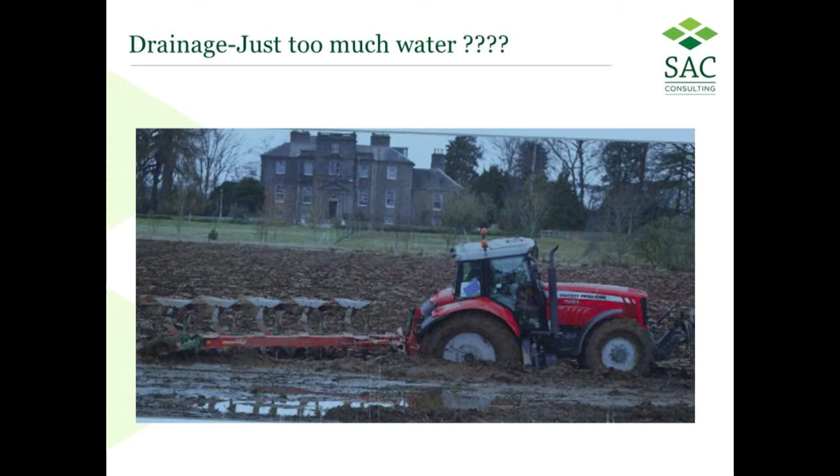Because we're certainly seeing a lot of fields that have never had water lying in them, ponded, that had never had that for the last 10 or 15 years. But we're also seeing areas where the problem is actually deeper. It's down below the ground, it's down at the drain level. So we're thinking a wee bit about the problems we see with poor drainage.

You drive along, it used to be you saw rushes and buttercups in your neighbour's field and said, well, he's not much of a farmer. Unfortunately, we're seeing more and more of those in our own fields. And it's simply because the water table is getting higher, more damage, more compaction, and we're seeing the sward open up. The sward's not lasting as long, having to reseed a wee bit more often, and we're getting these weed grasses. That's inefficiency, we're getting lower yields of grass or crop.

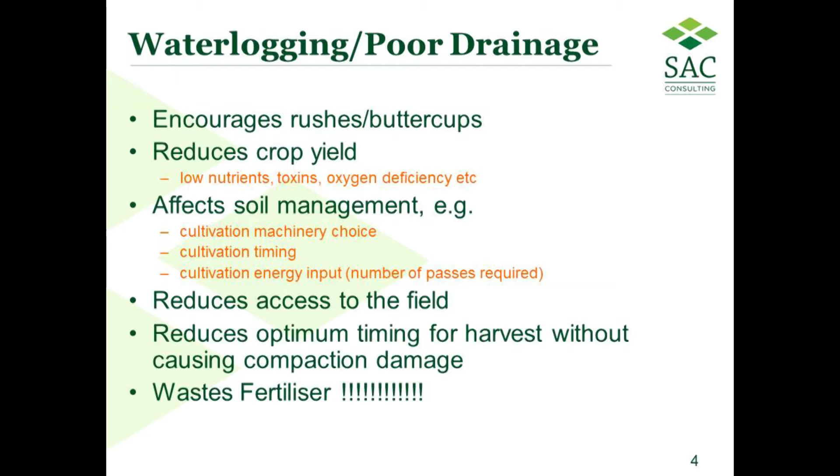We can't get in and do the work right. You know the problems, even getting access to the field is now proved to be a problem. We have a lot of big dairies now, and they seem to have increased in the last 2 years. We've got boys now going up to 300-400 cows, and you can put in as many cow tracks as you want. But once they step off that cow track, if you go grazing, that's where the damage has been done.

So we're saying to them, maybe we need to start looking at how we actually get these cattle grazed if these summers are going to continue. And I was very impressed with the gravel mole, I think that was a good tip as well.

It wastes fertiliser. Waterlogged soils, your nitrogen phosphate are not as available. So think about that. The benefits though are easy to see as well. We get improved root growth. Why do we get that? Roots will not grow if you don't have the conditions right. They need nutrients, they need water, and most importantly, they need air. If they don't have the air, they'll not grow and develop.

And if the air pores are full of water, there's your problem. So we're trying the whole time to create more air in the soil so that the roots develop better, and that's going to help our yield of crops and grass.

It's also an increasing problem. I'd imagine it's something similar over here - we're seeing more and more incidents of fluke in the southwest. We have sheep farmers that have dosed their sheep 5 times this year just because of the level of fluke. Remember, the important bit of the fluke cycle is that wee mud snail, and that wee mud snail loves ponded water. So we're now getting to the stage where we need to think more strategically and start draining some of these ponds and make sure the water isn't lying, and that might help break the life cycle of the fluke.

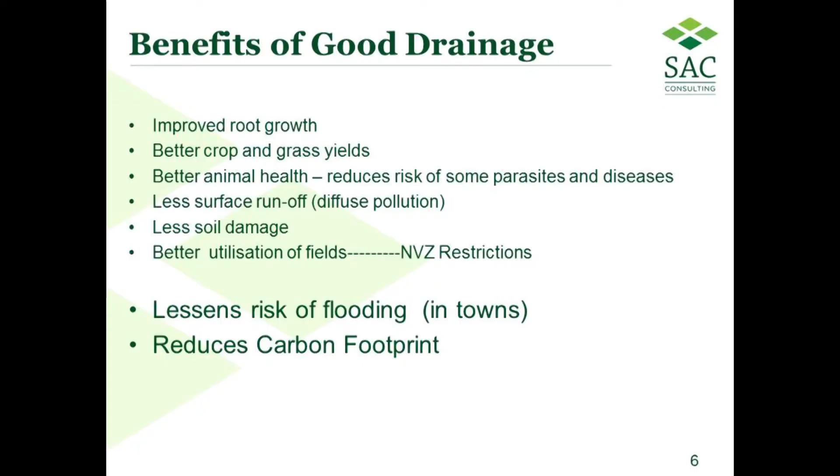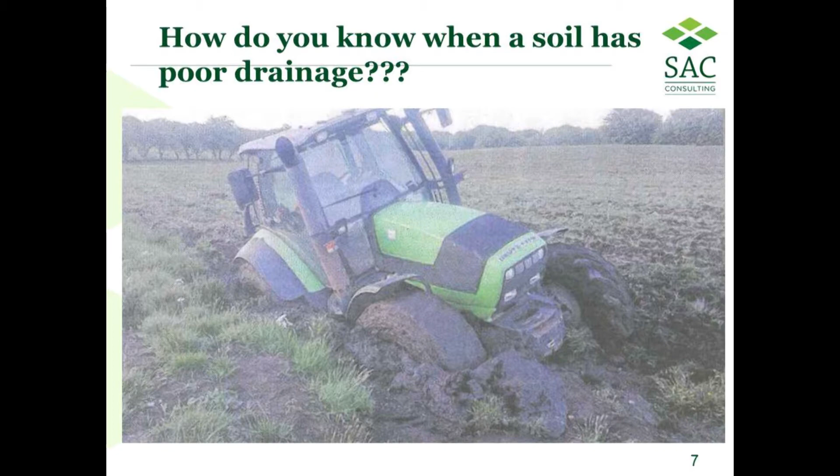How do you know when a soil has poor drainage? Pretty obvious - that's the problem. I've been there in that type of situation, and it's easier to get into that than it is to get out of it. So it's better in the long run not to put yourself in that situation, and we do that by thinking a wee bit about drainage.

That's one of the outward signs. Another outward sign would be getting stuck with the quad bike, or seeing water lying across the field coming off. It's just telling you water's lying on the soil surface and it's ponding, it's causing problems.

Dig down a wee bit with your newfangled machine - that spade you bought or were given as a gift - and see what's happening. Quite often with soil type, you start off with your topsoil, and then it comes down into your subsoil, with different layers below that. That critical depth is at 8-10 inches, and that's what we're trying to keep freely drained. If you dig down further, quite often 20-24 inches, you'll sometimes see the water coming out at the base of the topsoil. That's because it's hit a less permeable material and has to bank back up again, and that's where we get this idea of a perched water table.

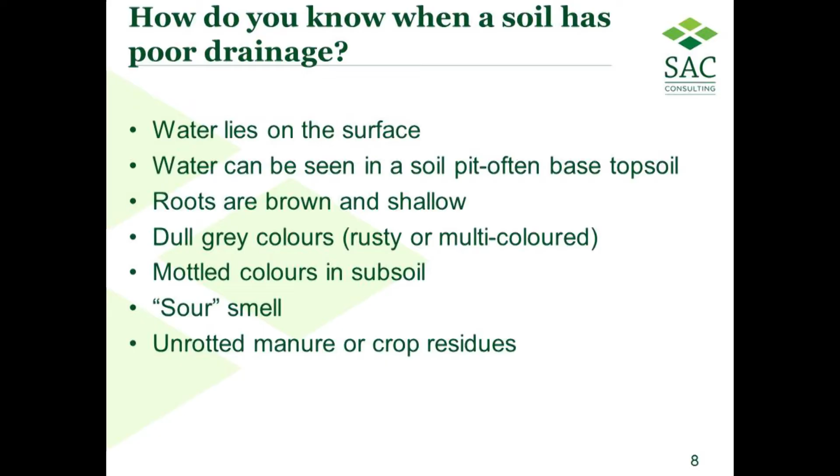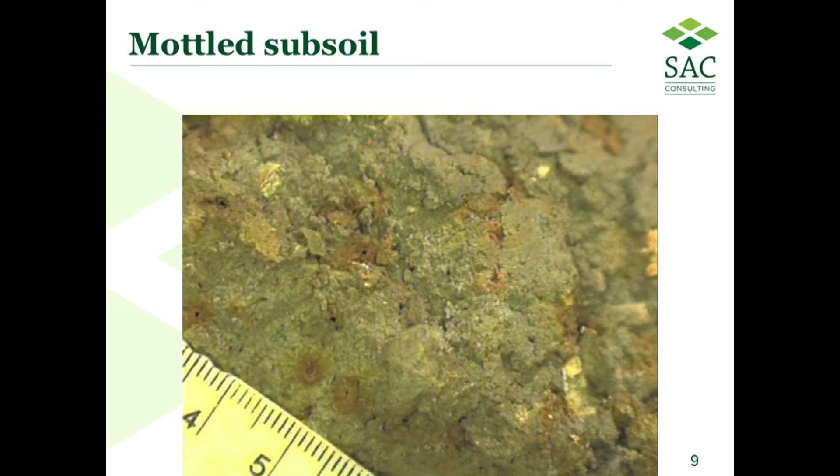You might also see it in the roots, which will be shallow, maybe brown. You'll see colours in the soil, this mottling, and that's just a sign of intermittent wetting and drying - that's the iron in the soil settling out again. It's in solution, and whenever the soil in the summertime gets drained and the air comes back in, you'll see it settling back out again. Sometimes you see it even in roots.

Like in here, you'll see that's a gley soil. That one's got a lot more problems because that soil will be periodically wet, probably for 7, 8, 9 months of the year. And you can see the impact it's having on the soil structure - there's no cracks, no natural cracks or fissures.

30 years ago I wasn't seeing that. It's a new problem, it's understandable - the weight of machinery has increased, the intensity of farming has increased, the number of livestock going across the field has increased. We're seeing fields that have been ponded.

I saw one about 5 months ago, and the fellow said, 'You come down, I've got an area, big pond, it's appeared overnight.' I said, 'What happened?' We went out to look at it, it sloped down, and he put slurry on via the umbilical, and whether it was a result of that running down and sealing, or whether it was just compaction further out, and then whenever it got heavy rain again - he said it rained really heavy the next 3 or 4 days after I put it on - it just got washed straight down into this pond area.

I said to him, 'Are there any natural drains to get down to clear this pond?' Because quite often the solution there is just to find a drain and gravel it back up again, get it away. He said there's no natural cracks or fissures, no natural drains in that, it was free draining before. I said, 'What are you hoping to do?' He said, 'Well, I'll run the subsoiler through it.'

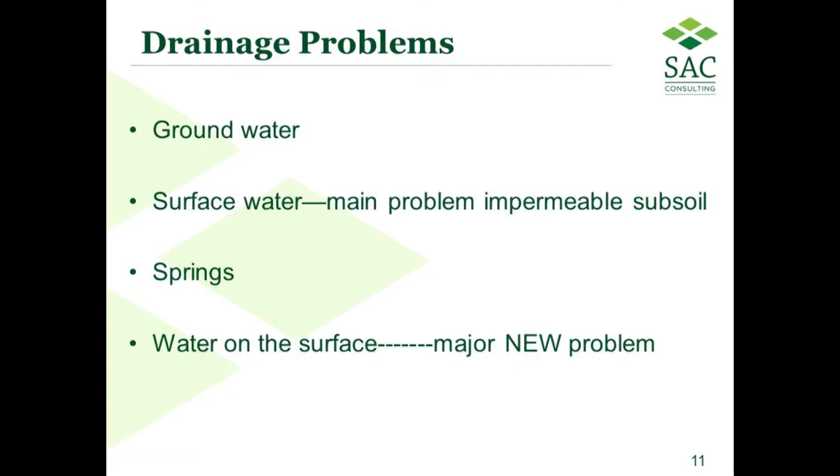Start off with the groundwater. It'll not be dissimilar to areas around Lough Neagh, anywhere you've got rivers, alluvial soil, even the shore. And the problem is always this water table rising up and down. All you can do is try to control it by putting drains in and leading them out.

Your drain depth will be dictated by the outfall, whether it's into a river, into the sea, or wherever. But the deeper you can go, the better with a groundwater problem. The deeper you can go with a groundwater problem.

Traditionally in Scotland, we have it now - you speak to farmers and they'll say you need to be down deep. And why is that? Because the old clay tiles were not down deep - they were down 3 feet, in some cases 3.5 feet. In some cases, a lot of them were done by Irish navvies that came across about 150 years ago. Those boys must have been working hard, but they were doing things wrong. That's fine if it's groundwater, but not if it's a surface water problem.

So think of the problems. With groundwater, deeper drains - we don't necessarily need backfill around them if that's the only problem, because these soils tend to be more sandy, alluvial type, free draining topsoil. You may put a bit of gravel around, pea-sized gravel as a filter, and leave it at that.

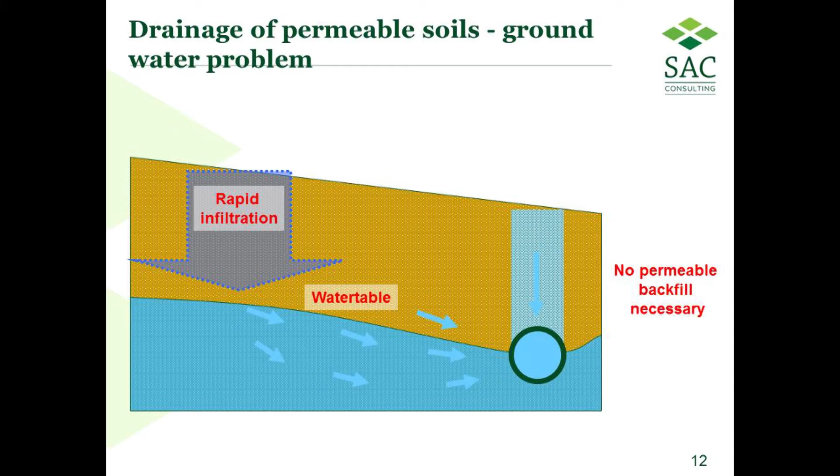It is possible you may end up with some surface water problems as well, and you may still have to go in - that's where you've got a combination. If it's just a groundwater problem, deep drains, and the closer you bring them, like all drainage, you'll lower the table and have a bigger impact, but you'll have to decide on cost.

So that's groundwater, reasonably straightforward to solve. The surface water problem is our most common problem, be it in Scotland or Northern Ireland. Think about what's happening - we've got this free draining topsoil, the water can get through, then it hits something that's not as well drained. The water will still get through, but it'll take time.

If you're in a flat area - this is the less permeable subsoil, and there's the topsoil - all that happens is the water comes down, hits this, waits, banks up, and eventually you get a perched water table. The water table rises back up again, and at the same time the cow's feet come down this way, and where they meet we get big problems with compaction. So we're trying to keep that clear.

It's fine if you're on a slope - it'll help, it'll keep itself clear to a certain extent, running along. If you dug down there, you'd see that water runs along, and eventually it'll run out and begin to pond back out again when it runs out of slope. That's a surface water problem - we're dealing with impermeable or low permeable subsoil.

The solution - it's not the pipe that's important, it's this gravel connection back to where the damage is. You're trying to get the gravel connection back up to the base of the topsoil. In Scotland, that's all we go to. I know in Northern Ireland it's common practice to go right to the surface. Think of the extra cost of gravel, but you must get it to that level - that's where we get the interface, taking that collected water quickly to the drain.

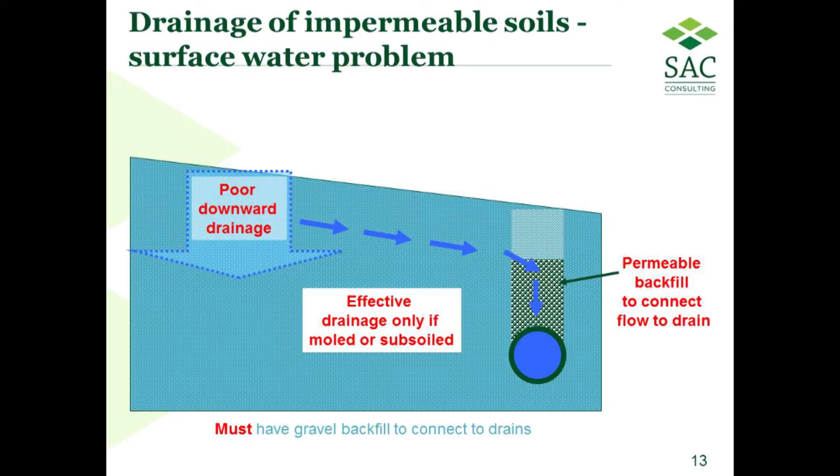And we're using this free draining, clean gravel - whether it's stone, whether it's quarter inch, whether it's pea-sized gravel, it doesn't really matter. It's the connection that's important. How wide should they be? In an ideal world, the closer you go, the bigger control you have over the water table.

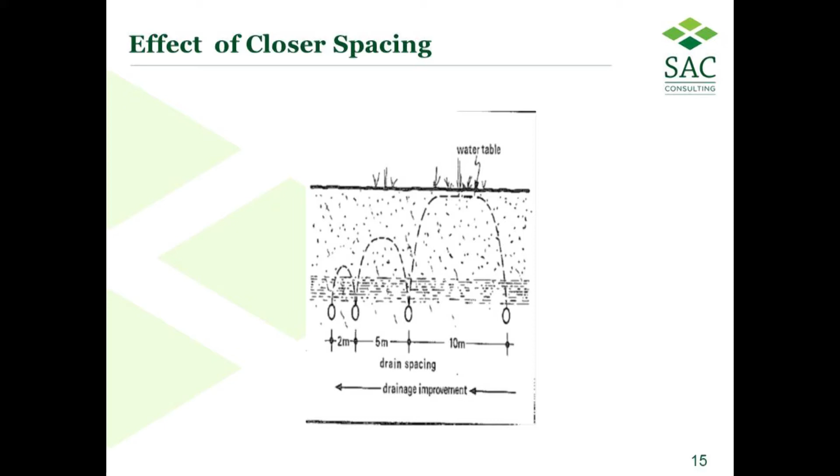So even with this perched water table, the closer I go, the bigger control I'll have. That's out at 10 metres, that's at 5 metres, and that's at 2 metres. The problem is your pocket - you don't maybe have deep pockets. It's all right for playing fields, they'll go down to 1 metre, and go with sand slits over the top as well. Same problem, but you can't afford to do that - or can we?

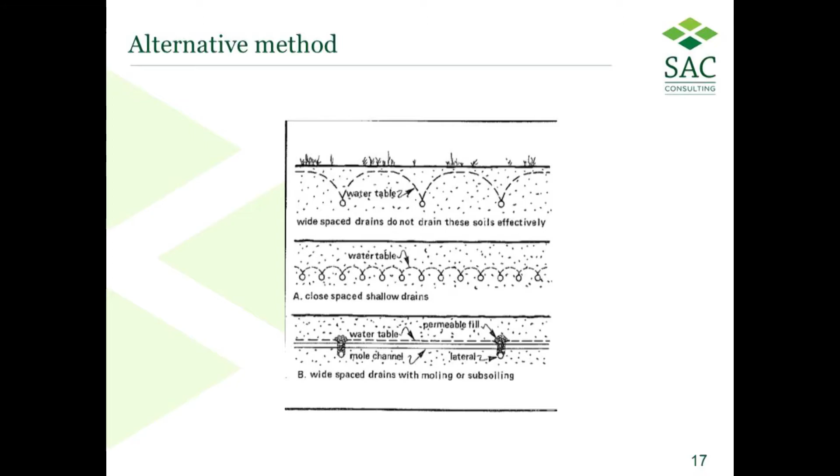There was a problem we were faced with 30 years ago, and we came up with a solution which was to think about secondary treatment. So with the primary treatment, we're still laying the gravel laterals, but then we're going to superimpose on top a whole lot of secondary treatment - in effect, closely spaced drains, whether those are moles, mole ploughed, or subsoiled - it's the same idea.

With subsoiling, you just get a lot more cracks all wanting to run. But the important thing is you run that at an angle across into your gravel connection, so the gravel's doing two jobs - it's providing the connection initially in its own right, but it's also now offering a very quick connection for the secondary treatment. Did it work in practice?

We did a trial in 1981 on a farm down here on the route down to Carlisle - a dairy farm, pretty heavy silty clay. It could take a mole because it had more than 35% clay, and it didn't have sand pockets. The biggest challenge was trying to convince farmers at that time - we were used to drainage being all about tradition.

Tradition on that site was 7 metre spacing, running up and down the slope. If you think about it, if you have a drain there, and a drain over there, the bit in between, and the slope growing, that water is going to run all the way down and keep running. Whereas if you put the drain across the slope, you connect it further up the field before it's got the chance to do as much damage.

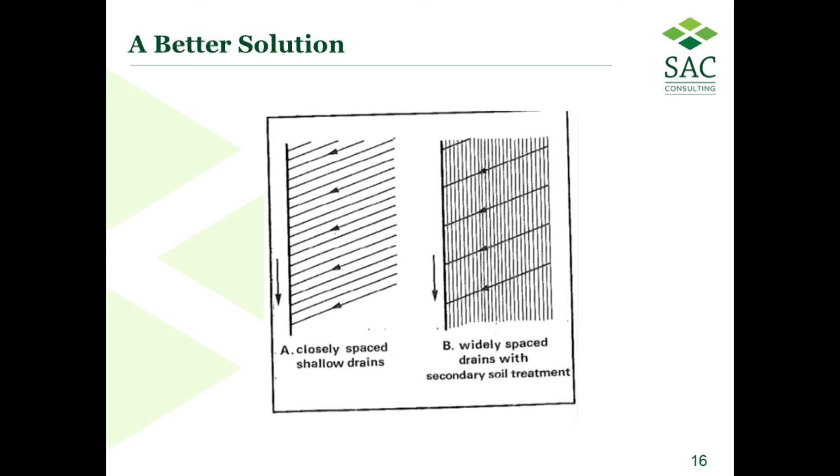So that was a challenge. We decided we'd go in, and instead of 7 metre, we went for 10 metre spacing across the slope, and compared that to 20 metre spacing across the slope. On this side we just went to the secondary treatment, which in this case was a mole plough. It could have been a subsoiler, but in this case it was mole plough.

Did it work in practice? We looked at drain flow, took measurements every week, and wanted to see how quick the topsoil could get dewatered. When did the drain stop running? You can see what was happening with the secondary treatment - the drain started running very quick, and look how fast and how much water was running, then gradually slowed down. By about 2 days it stopped running.

The other 10 metre spacing, the closer spacing, was fine - it was still doing a good job, but it wasn't as effective. Because it's still a drain every 10 metres, versus this being a drain every metre. So that's the difference in the benefit of secondary treatment, if you're able to do it.

The biggest problem in Scotland, where I am, is a lot of our soils don't suit the mole plough, so we're relying more and more on the subsoiler. For that, you're heavily dependent on the weather, particularly in late spring, early autumn. The last 2-3 years, we haven't had the weather for subsoiling - the subsoil hasn't been drying out. And if you go in too deep when it's too wet, it'll just form a kind of mole. So just think about the timing of the treatment.

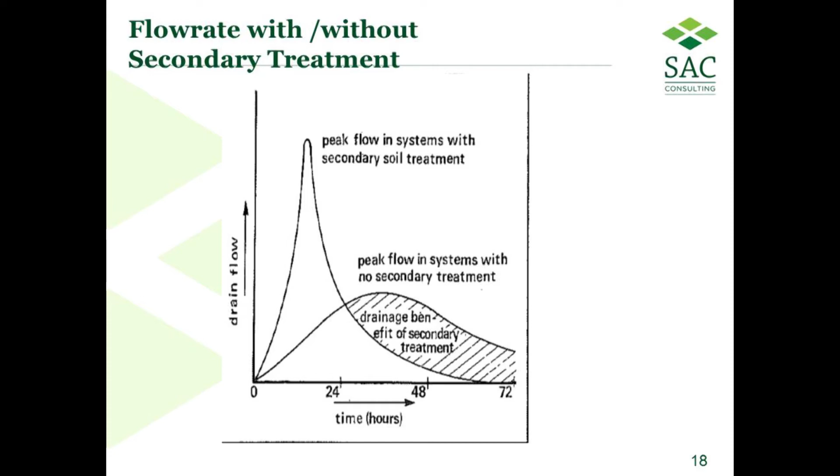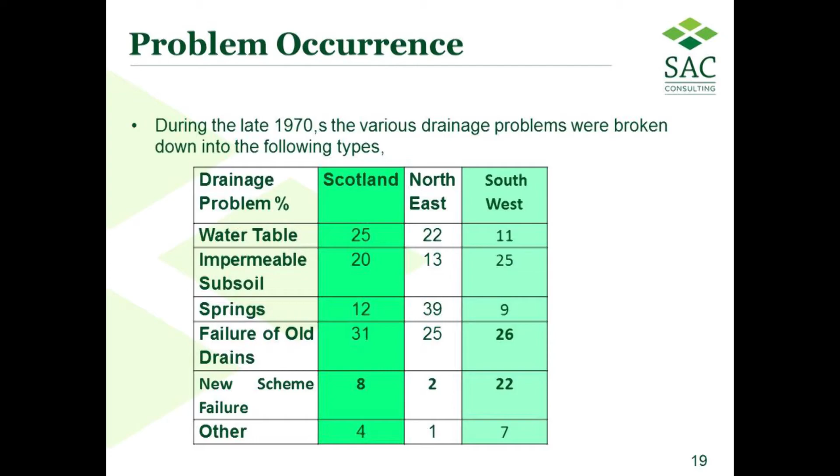It definitely works. As for types of problems, I said at the beginning we did a survey and were getting as high as 22% of new schemes failing. That was 2 years after these expensive schemes were getting a 70% grant. Why was that? It was a combination of 3 factors coming together at one time.

Plastic pipes had been introduced. Previous to that, it was clay tiles. The benefit of the clay tile was you could see it if you had put it in wrong - it was easy to see from the surface. With plastic, there was a tendency at the beginning where people didn't know how to handle it over our side of the pond, and contractors would just kick it in. It was going in up and down and sideways, and then they would backfill.

And a lot of farms, it wasn't traditional to use gravel backfill. Now, there's some soils you can get away without using gravel backfill, but even where they were draining, you should probably be using gravel backfill - that might help. But they were going in, putting these pipes in, and then just backfilling over the top.

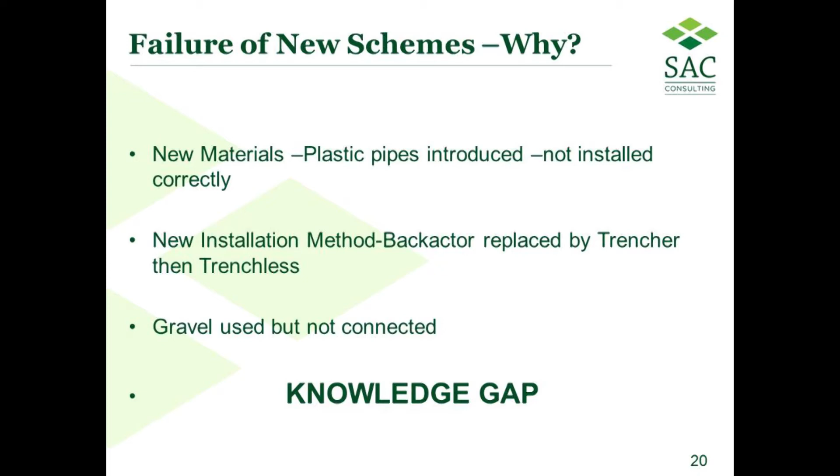The right way, or best practice way, to lay a plastic pipe gravel system - I would always start off by digging your trench as flat as you can get it, or to a break flow, and then stick in the first 1 or 2 inches of gravel. It doesn't need to be any more than that, and that gives you a nice clean bed for the pipe to sit on.

That straight away means your slots - there's as many slots in the bottom of the pipe as there is in the top - are sitting nice and clean from the day the pipe's fitted in, able to receive the water. Stretch it a wee bit, don't overstretch it to weaken it, put in some bats of stones to keep it in place, and then carefully with your gravel wagon, or if it's a link box with gravel you're shoveling in, put the first shovel of stone in carefully so the pipe doesn't bounce up, because you've only got 60 mil of pipe to work with. Once you've done that and covered it with 3 or 4 inches, you can go away and leave it, or let the young fella loosen the gravel wagon and bring it up to whatever level.

You're not going to do any more damage. You've done the important bit, got it right, got it off, and that in itself is going to extend the life of that scheme.

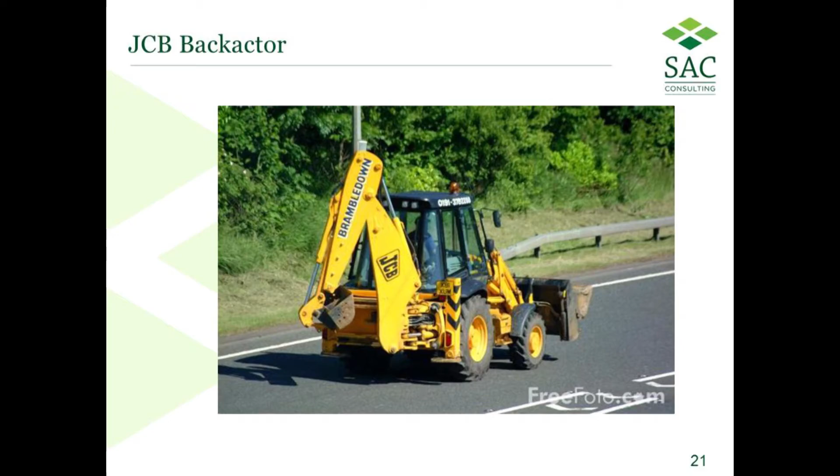The other thing we had was the type of machine we were working with. We were back 30 odd years, 35, 40 years now, and they were using the back actor. Absolutely nothing wrong, good machine, a digger, digging a trench, there's no problem with that. But they were using it the wrong way, simply because we had soils where they should have been using gravel backfill with this surface water problem.

And they said, oh, we've never done that before. But at that time, they were always using the back actor, and they were maybe taking the topsoil out, setting it to one side, and then maybe putting that topsoil or sod back in again on top of the pipe. And that in itself was free draining, almost like a kind of connection.

And then even the sods you were putting back in themselves, you had these natural cracks and fissures. So although it wasn't gravel backfill, it was almost serving the same purpose.

We began to change from the backactor to a trencher machine. The trencher machine has a chain on the end here, and it sends the soil out 2 sides, and all they did was come up, then come back in again. They weren't using gravel at this time, they just bulldozed that in and filled the trench. So we had a nice pipe, sealed with that material, because there was no mixture at top.

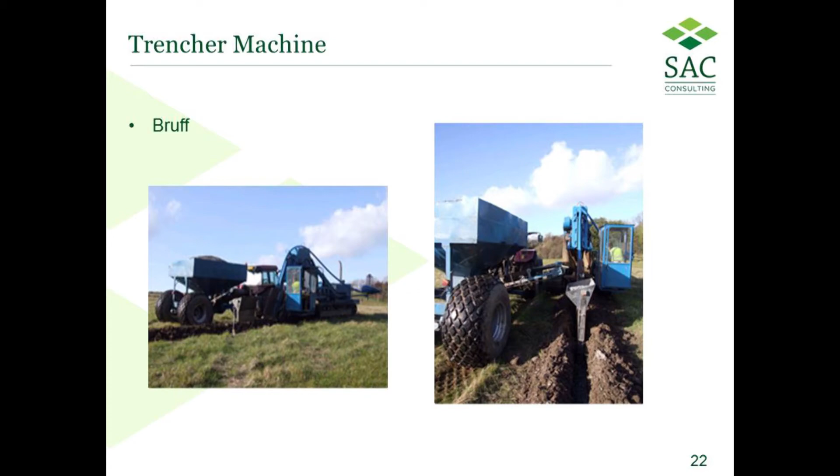You couldn't separate the topsoil. That machine was just grubbing up everything, so you ended up getting topsoil and subsoil mixed, something sealed over the top of the pipe. We had no connection. So that was a damage mistake.

We even tried it with the trenchless machine, and that's the business end of it. It's just like a giant mole plough, and it only has 100 mil, 4 inches spacing. So you think, how easy for it to seal again without gravel backfill.

We started saying to contractors, you must start using gravel, and they started putting the gravel hopper on the back and going through. The benefit of that machine is output. You can do a horrendous amount of acres in a day with that machine. You're only using 4-inch wide gravel, so it's more efficient, cheaper in that sense.

We did run into 1 or 2 problems with bigger stones. I tried using a 2-inch stone, 1.25 to 2 inch, and it started bridging. And they began to say the only way you can actually do that is using 1/4 inch or pea-size gravel. So again, for that type of machine, 1/4 inch gravel or pea-size.

Traditionally now, unfortunately, a lot of our farmers think that's the only stone you should be using for drainage. Nonsense. You can get away with your 2-inch as long as it's clean material. You only need the pea gravel if it's specific, if it's running sand or you're trying to use it as a filter. Any other time, the coarser gravel is fine, as long as it's clean.

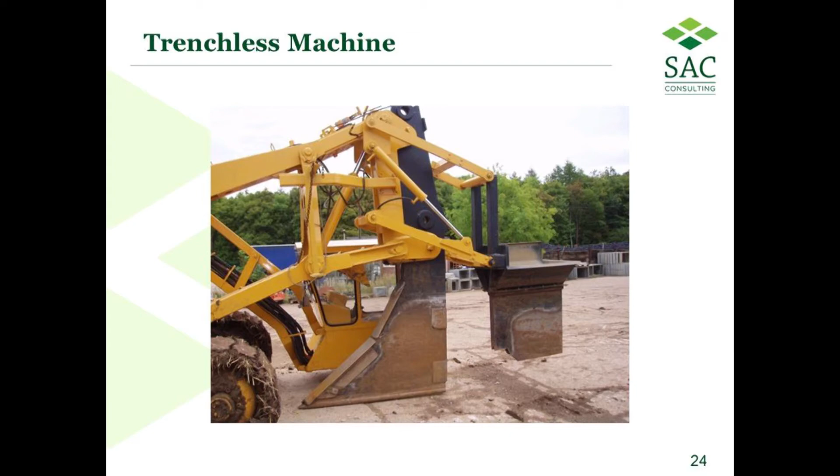We're now seeing a group of farmers, big dairy boys with thousands of cows over near Castle Douglas, and they're saying the price of gravel delivered, is £15 a tonne with us. If I use my own rock, I can get it for £3 a tonne. And they've now started digging out and just backfilling with the rock. And I can see where they're coming from, and it's fine.

They've even said, to avoid the issue with the plastic pipe and maybe big chunks of rock dropping on it, they've opted for a twin wall, thick plastic pipe, double skinned, 100 mil, costs £1.40 a metre compared to maybe 50 pence a metre for the 60 mil plastic.

And I'm saying, boys, you don't need to do that. You'd be cheaper to go and actually spend some money on cheap gravel and then still go with your rock. But you'd be better to fit your rock and spread it over and make sure it's clean.

The other thing it'd be better to do is not make the trench too wide, and that's one message you boys should take home. We would have been quite happy working with an 18-inch bucket, 20-inch bucket, tapered down to 12-inch, making a good size of trench, and the gravel wasn't too expensive, and that's the system to work with.

In Scotland, we quickly got contractors thinking about using a 12-inch straight bucket. Some even get down to a 10-inch straight bucket. In Ireland, you can get away with it, because you'll use less gravel. You still get plenty of gravel for that connection, more than enough.

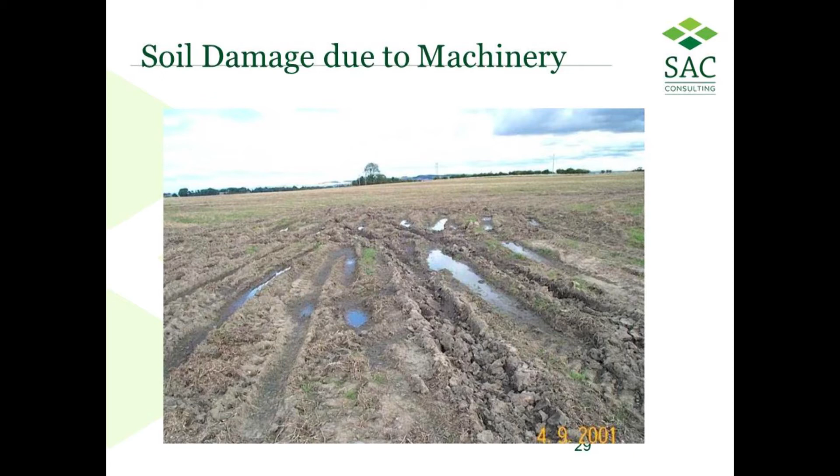You may have bits where silty clay is causing you ochre. You decide. You may have bits that have a better slope, you go a wee bit wider. I would always start at the ditch.

Sounds very sensible - if you've got problems, go back and see if your ditch works. Does that need to be cleaned out? We've had a lot of farmers who've gone this year, this spring, and started cleaning out the ditches. And they've said, not only has it helped, with a wee bit of pressure, with a wee bit of rodding or jetting, they've been able to get their drains running again.

And you haven't had to go in and do a full system, it's just a wee bit of maintenance. That's particularly the case if there's iron ochre in it - the jet may get it going.

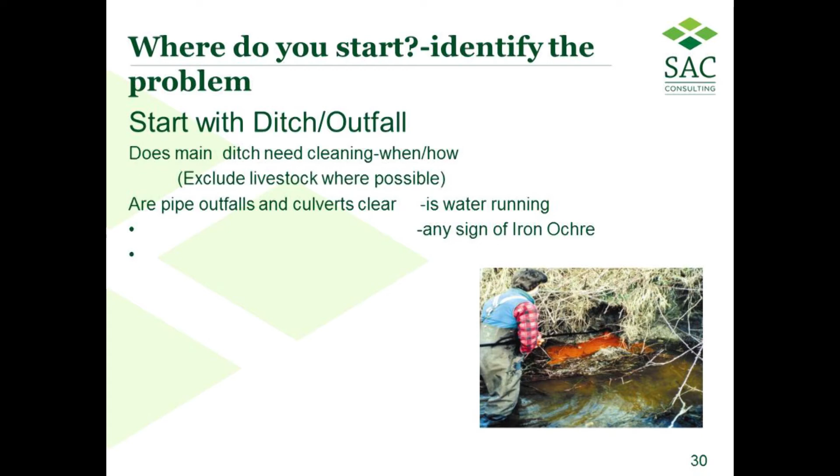When you're using gravel, the one thing I'd always say is, bring the gravel right out to the mouth of the drain, but stop before that. Good practice to put a 2 metre straight pipe on there to bring it out into your ditch. It's even better practice to bring the gravel to there, because if anything happens to that drain, the gravel will still act as a stone drain. So make sure you connect that right to the mouth of the ditch or into your leader.

Over in Scotland, I always say, if it's peat, leave it, unless you're Irish. The reason for that is it's difficult soil to drain - it's got a very low soil conductivity. You would need to have drains every metre.

So it might not be the first one you should be trying to sort. It might be the ones further up the slope - you'll be able to drain easier. You need to think, are you able to drain?

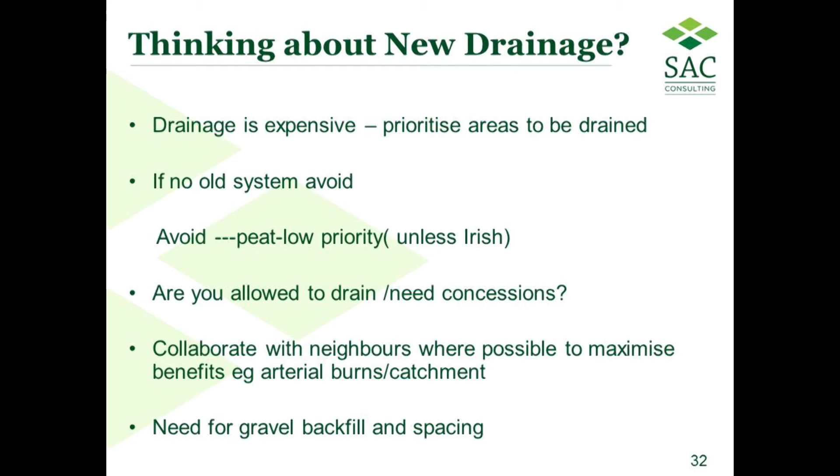We've already covered the design - you're going to be going across the slope. How close should the laterals be? I'll point out, the spacing is going to depend on how deep the pipes are, how much slope there is. You can get by with wider spacing if you've got a stronger slope. So it might be 10 metres at the top, might be 15 metres further down. You might even be out as wide as 20 metres if you think of the secondary treatment.

And you're thinking of intended land use as well. A dairy boy might, or a cropping boy might want to spend a wee bit more, be able to afford to spend a wee bit more than beef and sheep. So you have to sit down and decide - the spacing is going to influence the cost.

7-metre system, 600 metres of drainage every acre. 20-metre spacing, 200 metres of drainage every acre. So you can do 3 times the amount for the same cost.

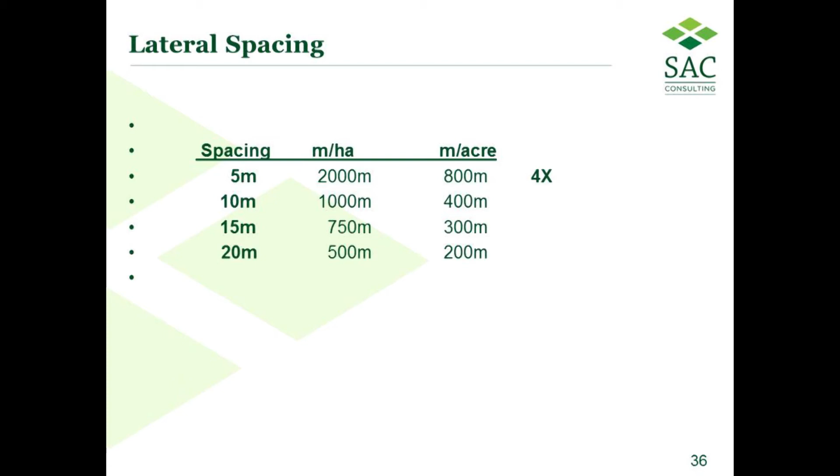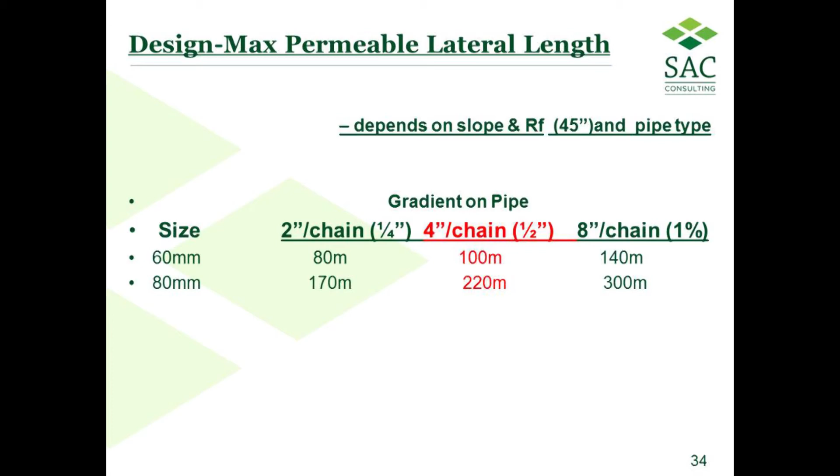It's not too big a problem, because if you're using gravel backfill, it'll still run, it'll act as a sump, and it'll wait to get into the drain and away. It may even run through the gravel.

How deep for the pipes, I've said, it depends on the problem. If it's a surface rock problem, don't go too deep. I'm saying 26, 28 inch cover is plenty.

If it's gravelled, a bit deeper for the leader, and deeper again for peat, because peat will dry out and shrink. I've seen cases where, at home, we put the drains in, my father said the peat is shrunk, and sure enough it had, because it dried out. He thought the drains had risen, but the peat had actually shrunk. So allow for that, because it'll come close to the surface.

It's going to be governed also by whether you have any old systems. In Scotland, we have to think about the old system. We have these drains going up and down the slope every 7 metres, and some of them are down 3 foot, some are down 3.5 foot. If they're down 3.5 feet, I leave them well alone. If they're sitting around the 3 foot and still working, I'll go with every third lateral going across and go deeper. I'll not do the others as deep as that.

But think of how you connect the old system as well. Size your leader accordingly - a 6-inch plastic R drain, one will take 5 hectares, one will take 8 hectares. Quite a difference.

This one's got turbulence, it's the corrugations on the inside, and you get turbulence. You get the smooth R drain, that could have been a 6-inch plastic or 6-inch concrete, smooth, no turbulence - you carry a bit more water.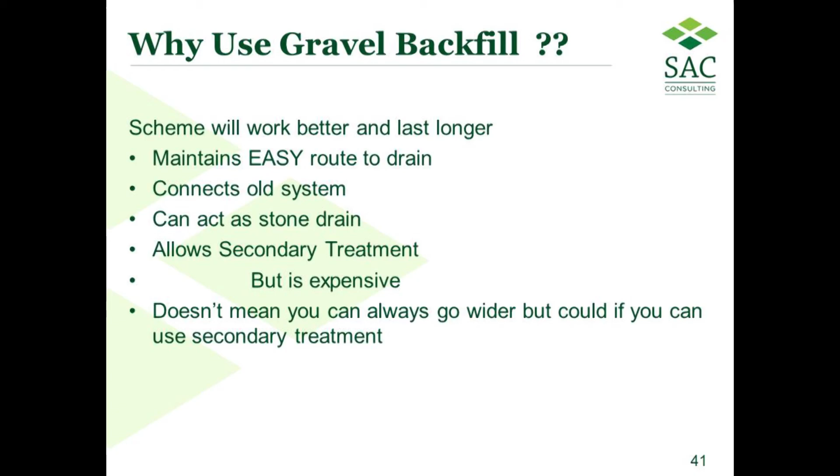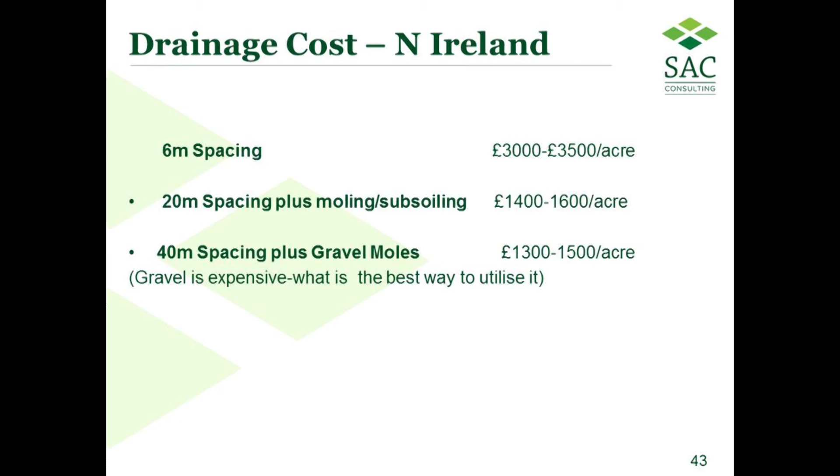Gravel backfill's main purpose is to maintain an easy route to the drain and get that topsoil dry quickly. It can also connect into the old system, acting as a stone drain if anything goes wrong, and it does allow secondary treatment, but the gravel itself is expensive. Think about the cost and make your money go further - don't have drains too deep, only gravel to the base of the topsoil or a couple of inches above it. It doesn't need to go to the surface; you can always go back and put bubble holes in later. Think about a higher trench, but you can go down to a 10-inch bucket grade, and think of sensible spacing.

You'll see the cost really go up if you don't plan well. Only do drainage work when it's dry - that sounds like common sense, but I think boys in Northern Ireland tend to do drainage in summertime, whereas in Scotland we have a tradition of draining in the wintertime. You're 50% more likely to have a failure if you drain in the winter.

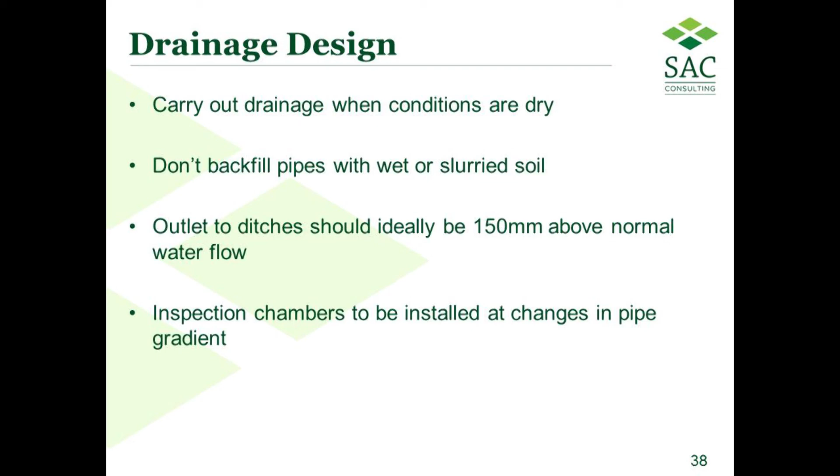Don't backfill pipes with wet, slurried soil. Make sure your outlets are sorted - if you've got peat, think about the issues there. With ochre, consider individual outfalls so you can rod the drain. If you're not prepared to do that, put in a manhole and lead a couple of drains into it so you can still get in and rod or jet them.

Think about roots - where you pass trees or hedges, they should be sealed off. My brother was telling me yesterday about a 6-inch drain job we did about 40 years ago. He said we should have gone for perforated pipes with 6-inch solid concrete, sulfate resistant, and put gravel around them - that would help with field drainage too. But he also said there were roots in these 6-inch pipes that you have to sort out. So where you've got a hedge or a tree, come out a bit rather than putting your leader drain right in tight against it - come out into the field a wee bit.

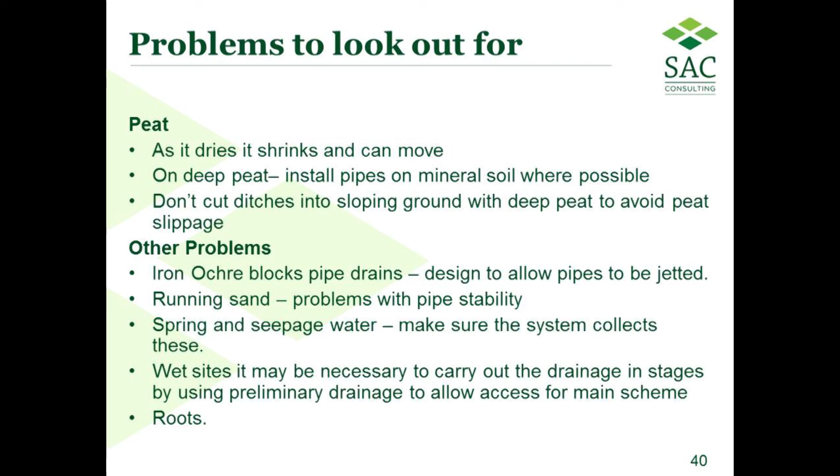We've seen problems where boys put kale in, or rape, after doing drainage in a hill situation. If you get a dry summer, the roots go straight for the water - and where was the water? In the drains. I saw 30-40 acres on one farm destroyed simply because of this. We got to the stage where we were actually recommending that where you've got kale in, if you think it's going to be a fairly dry summer, you go in and spray off a strip across the top where you've drained. So think about roots and these other problems.

Think also of your wider responsibilities - be that ESAs, triple SIs, or areas you're not allowed to drain. You might have been allowed to drain it 30-40 years ago, but think about your cross-compliance issues now. Speak to Don and his team about that, they'll keep you right. Over with us, you can't go up and drain virgin hill - you can use sheep drains, but you can't drain virgin hill with rough grazing. You shouldn't be piping ditches without consent. When it comes to ditch maintenance, our environmental people now say you can only go down one side, across, and pull up - it used to be you'd go down one side, across, and back up the other side with the digger's jib. Now that leaves one side with the same vegetation for the wee beasties and bugs to still run through.

Take home points: don't rush in, pick the right field, decide what's going to make you money. You must work out what the real problem is - do you need a totally new scheme, or just a partial scheme? Design it right, think of the spacing, the gravel needed, the depth, and other problems, and work out the cost benefit. Use a drainage contractor, hopefully experienced, not somebody who's just able to jump on a digger. Seek independent advice from Darren or wherever, and be aware of your environmental responsibilities.